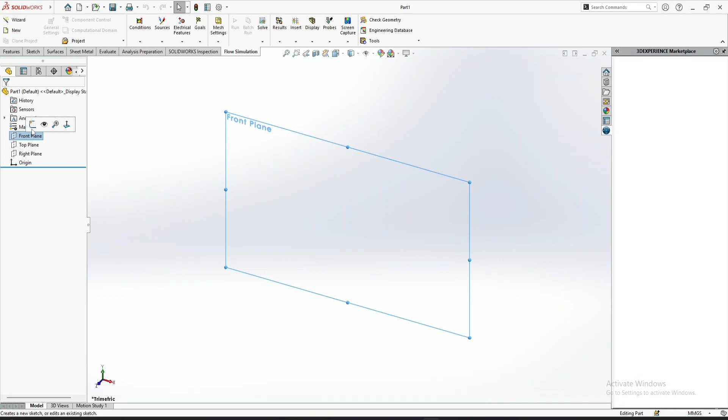So you can see it on there, and here we are going to start from the backside, that is like this, a rectangle. The dimension of this rectangle is, so this side is 110 and the height is 60. So select the front plane, sketch, and the rectangle, and from here select the center rectangle. From origin, make a center rectangle of dimension. The height is 60 mm and the width is 110 mm.

And now we are going to use sheet metal, and you can find the base flange, or you can first change here some sketches. So you can see this is given as 30, this arc. So we are going to make an arc from here to here and like this, and escape. Now smart dimension, this arc is going to be of 30 radius, and select this center point, press the control button and click on origin, and then make a relation vertical.

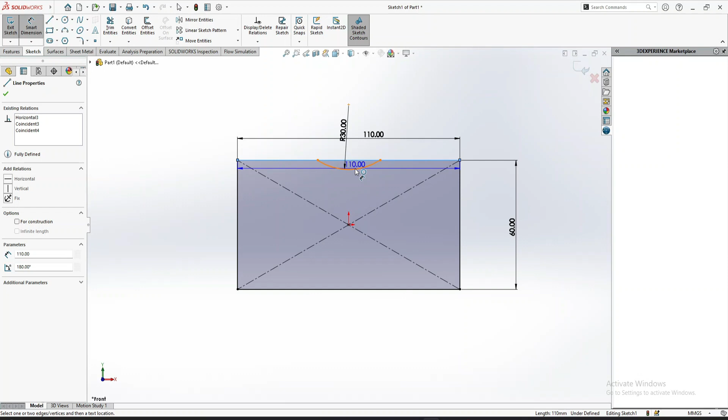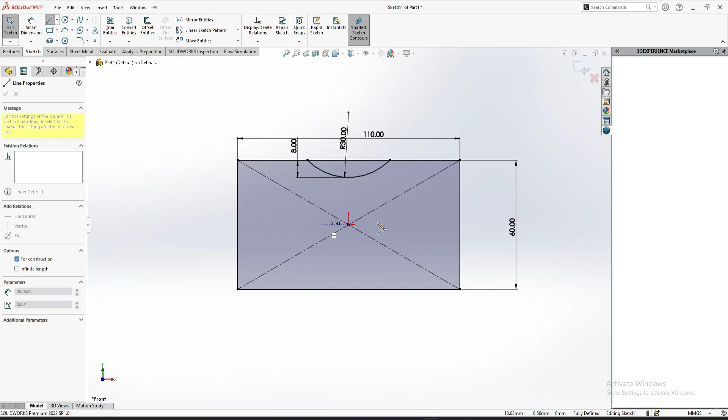After that, smart dimension, from this arc to here the distance is going to be, I guess it's 8, let me check it. Yeah, it's 8, so this is done. Now next is select the line for construction, make a horizontal line, escape. Now mirror entities, I want to mirror this arc, mirror about this line I made just to mirror it, and okay. Now trim entities, I want to trim this one and this one.

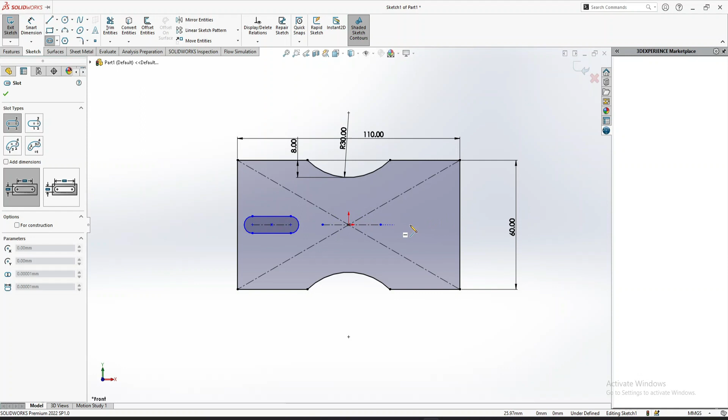Now you can see there are two slots, one here and one here. The dimensions are 15 by 12. So let's make a slot from here, and from here similarly make a slot, escape, select one slot, press the control and select another slot, and make the relation equal. Smart dimension, this is going to be of 15 and the radius is going to be 6, that makes it of 12.

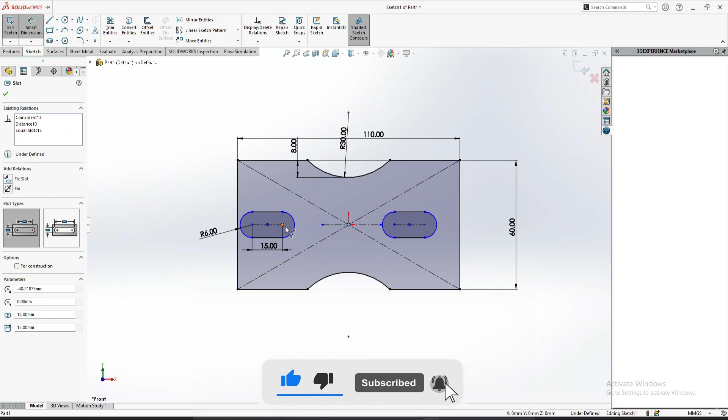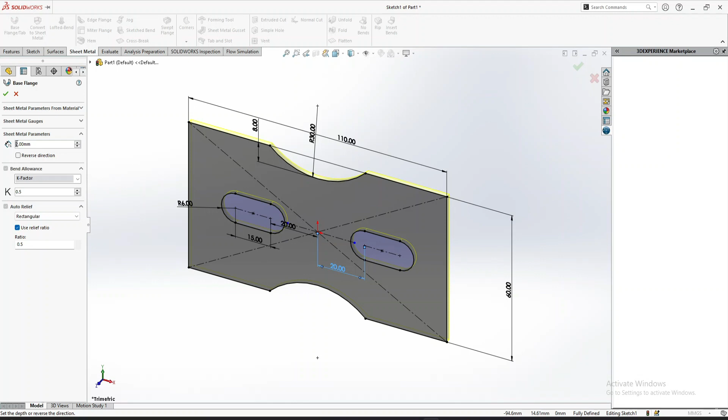And next is, we want a distance from here to here, that is going to be 20, and similarly from this point to this point it's also 20. Now this side is nearly done. We are moving to sheet metal, and this time we are going to the base flange tab. Sheet metal parameters, the thickness I'm going to make it 2, and done. Now Control 7 for isometric view. This back side is done.

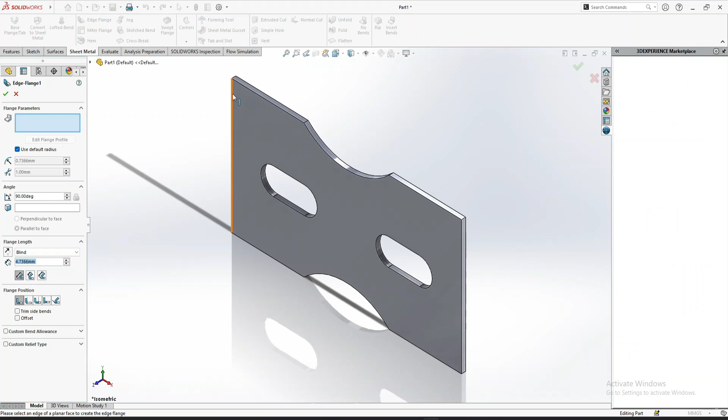Now we are moving to make this left hand side. So for this you have to use the edge flange. Select this edge and this side, and this is going to be, I think it's 40, but let me check, it's 50, okay. This is basically 50, okay. And one more thing, uncheck use default radius, you have to make the radius 5, so you can see here this radius is going to be 5, and okay.

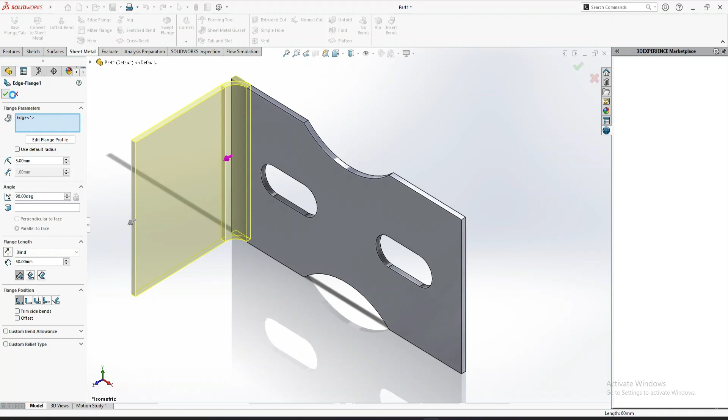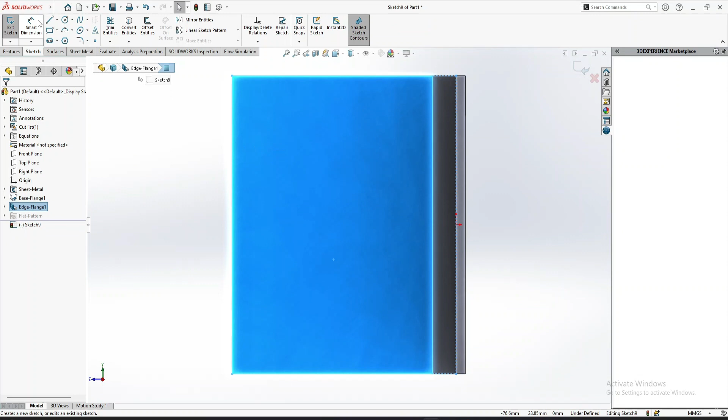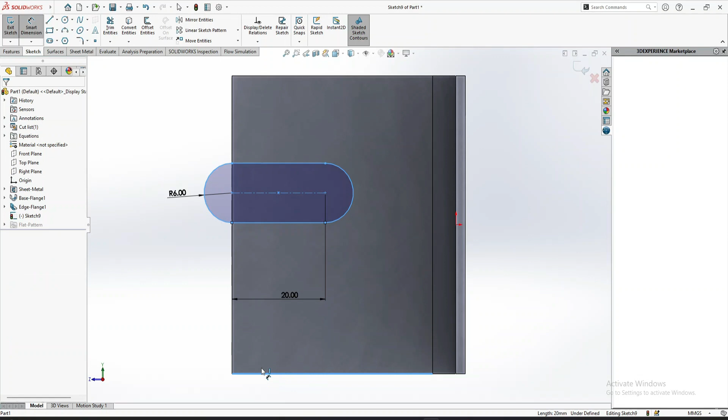Now select this face, sketch, and here you can see we have a cut slot, and for holes, first make a slot that is going to be 20 by 12. So the slot was horizontal, and this is 20 by 12 mm, and the height from the bottom is, let me find, it's 30 mm. So from here to here the distance is 30 mm. It's nearly at the target position.

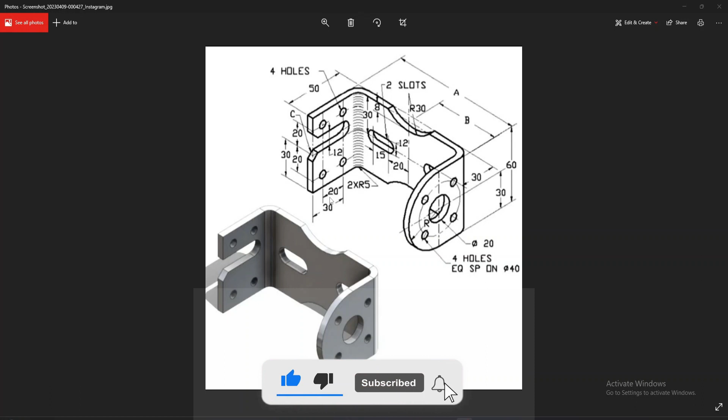Now we have to make a rectangle. Just make a rough rectangle and make the relation for construction. Now smart dimension, this is going to be 20 mm up, this side is 20 mm, okay, and the height is going to be 20 plus 20, 40 mm. This side is going to be 40 mm. And now let's take 10, that means from here to the bottom the distance is 10 mm.

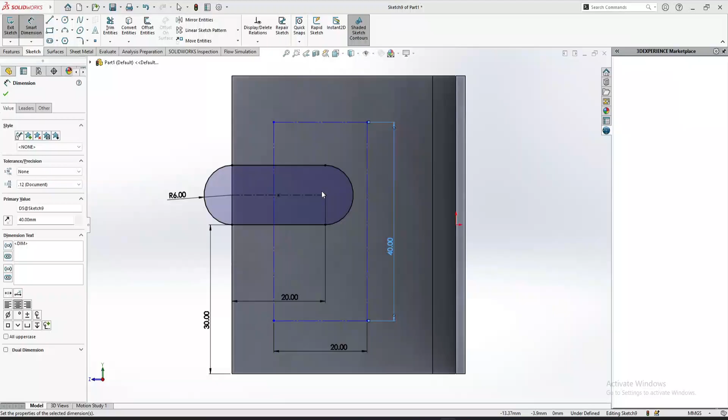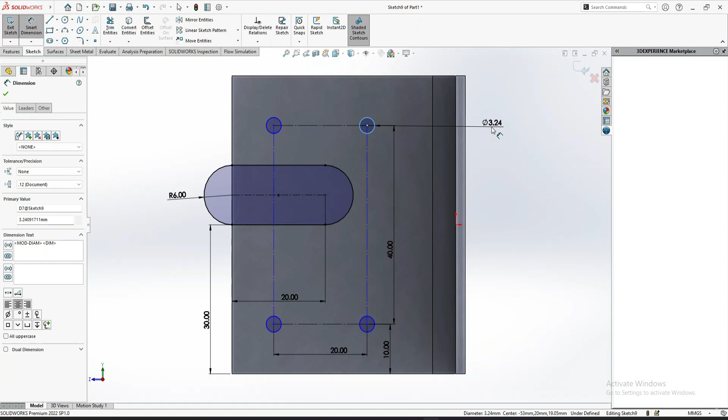So from here to here is 10 mm. And now you can simply make circles on all the four corners. Escape, press the control button and select all the four circles and make the relation equal. And these circles are going to be of diameter 5 mm. And done. It's nearly done.

Now Control 7 for isometric view, and we are going to Features, Extrude Cut. And okay, so this part is cut, but you can see here is a chamfer. So you can do chamfer from here, or you can use it from your corners. So it's up to you. I'm simply using chamfer, and this one is going to be of 5 mm. And okay, now this side is completed. Now we are moving to the right hand side.

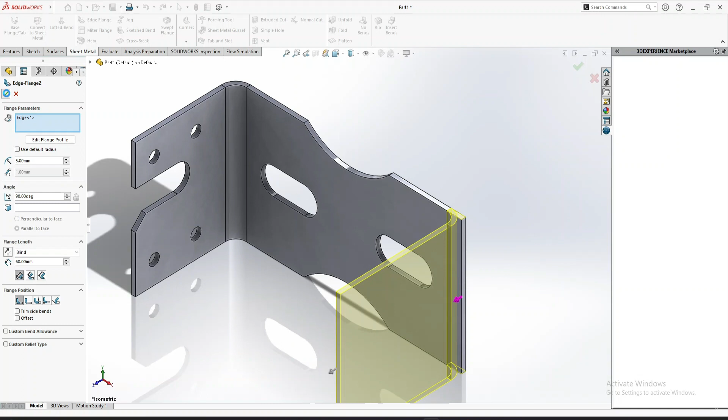For this, let's again go to Sheet Metal, Edge Flange, and here you have to select one edge. This is going to be of 60 mm, and use default radius. Again we are going to take a radius of 5 mm, and okay, now this is done. Select the face and the sketch. Okay, now we are going to make an arc. We are going to make an arc from the midpoint here to here and here.

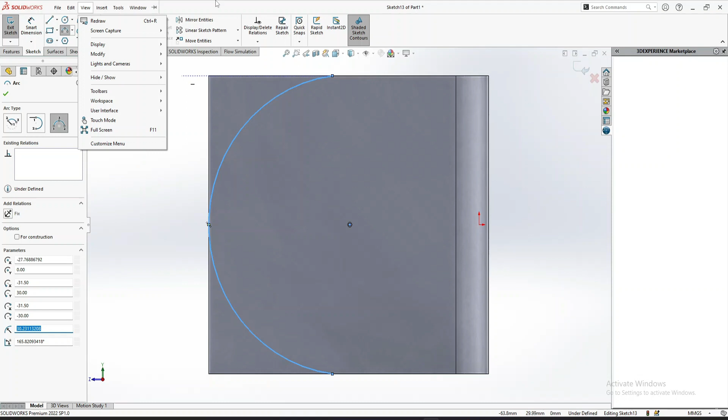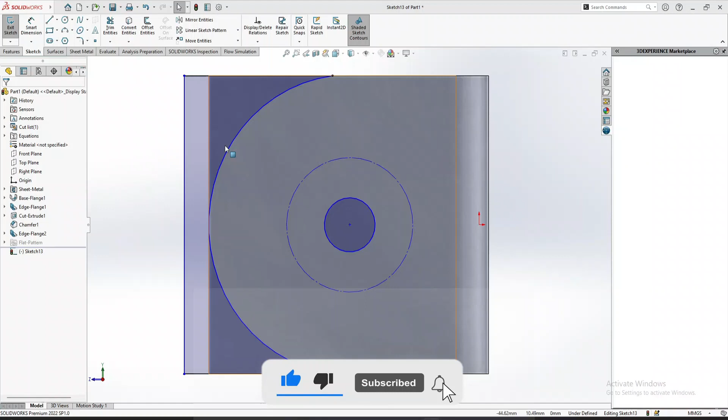Now we need circle, one circle here and one circle here, and this circle is going to be for construction line. From here make horizontal line, vertical line, and let's close this one. Now it's time to mention the dimensions. So this is going to be of 20 and 40. So this is going to be of 20 mm, and this is going to be of 40 mm.

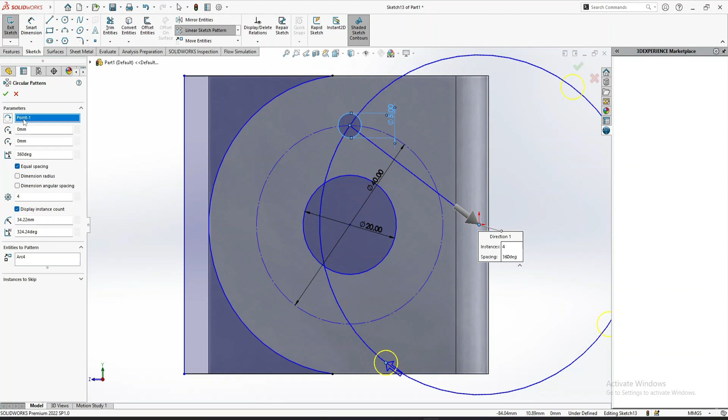Now it's one more important step. You have to make a circle. This circle is going to be of 5 mm dia, and now it's up to you. You can make 4 circles, or the simplest method, you can go to Circular Sketch Pattern, select this circle, select this point, delete this, and select this origin. So these circles are going to be here, and here we have mentioned 4, so these circles are 4. If I just make it 6, it becomes 6. So I'm going to make it 4 and enter.

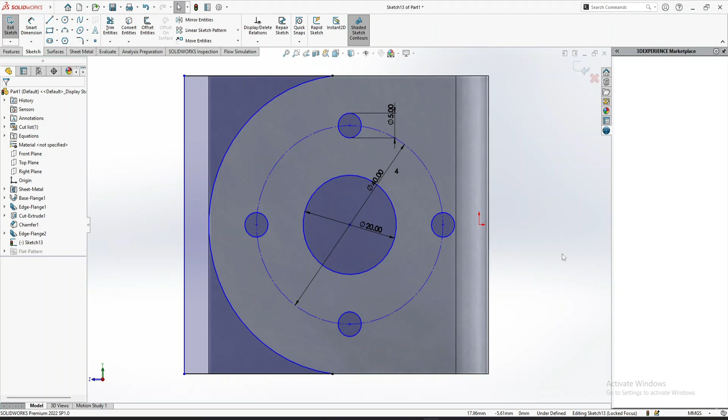Now Control 7 for isometric view. I'm again going to Features, Extrude Cut, and we want to cut this whole sketch, and this is done. Control 7 for isometric view. Our part, you can see here, is nearly done. Now we can give it some appearance.

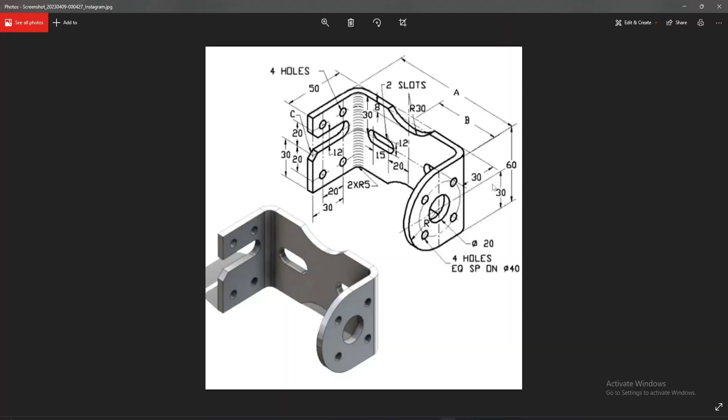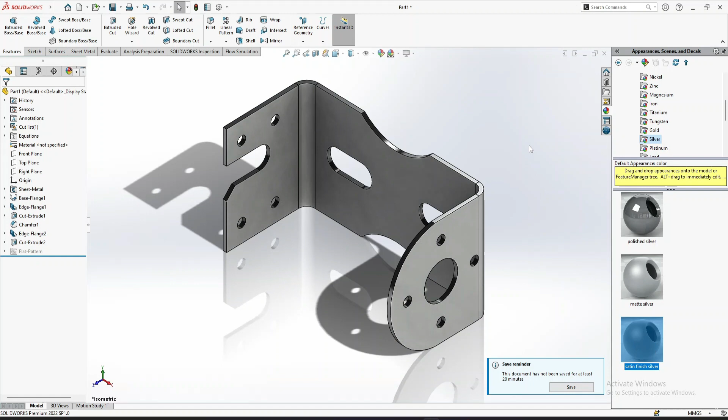For this, you can go to the appearance tab, and from the drop down you can select any material that you want. If I just go to metal, then let's make silver. Where's the silver? Let's find silver, and I'm going to use satin finish silver. And for the color, I'm just going to use this one. And okay, so this is how you can make any sheet metal part.

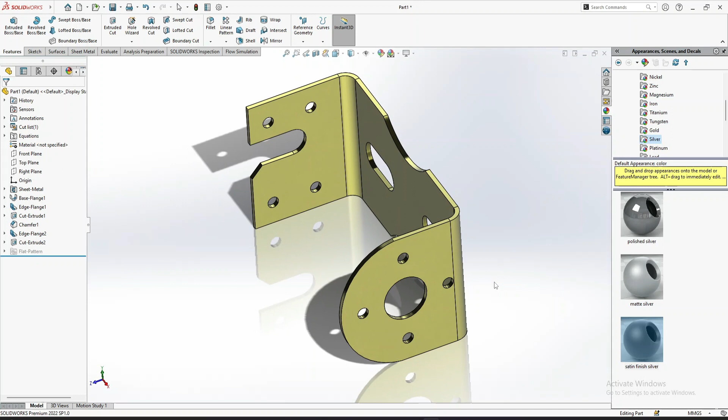And one more important thing, Control 7 for isometric view. Now you have made this sheet metal part, and one of the features of a sheet metal part is that you can check it by flattening. If you look at my thumbnail, you can see this whole part is flattened in a single piece, or you can say in a single plane. So how can you do this?

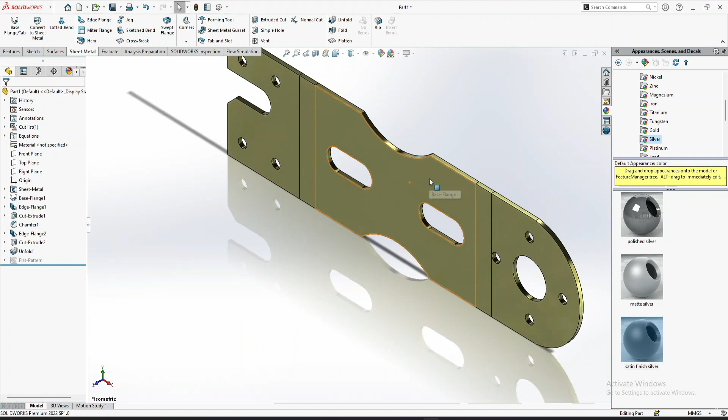Go to Sheet Metal, and here you can find Unfold, Fixed Face. You can select this base face, and for bends to unfold, simply click All Bends and done. Now Control 7 for isometric view. This is the whole sheet metal that you are going to use to make this part. Control 7 again for isometric view. So here our tutorial is done for this sheet metal part.